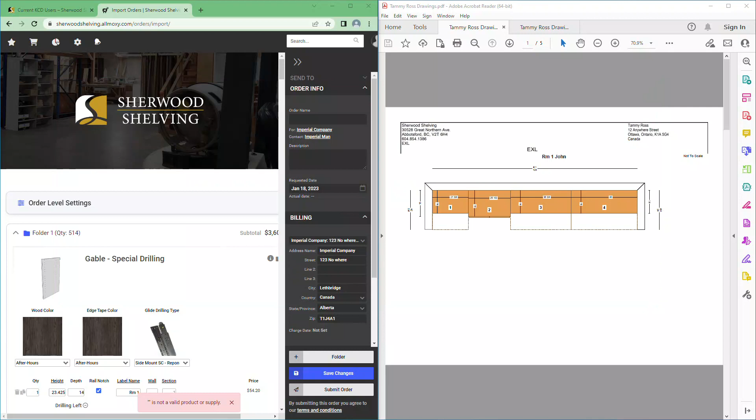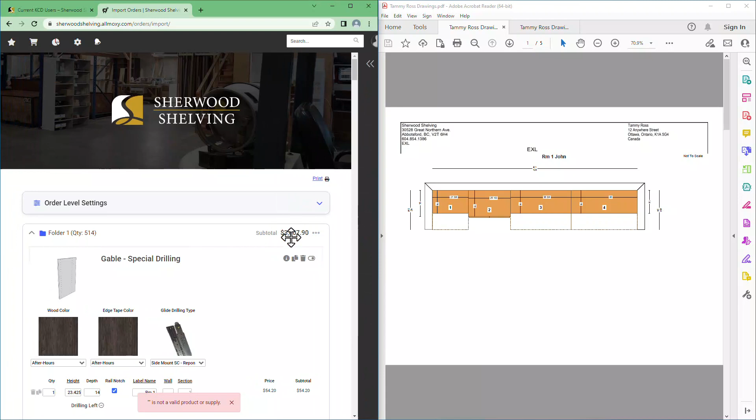So what I've done is I've split my window with my drawings on the right and the online ordering on the left. I'm just going to minimize this menu so you can see a little bit better. If we look at the drawings, you can see units 1, 2, 3, and 4 on this wall, and unit 2 is 16 inches deep.

Now, if you haven't looked at the video on how to change things to line drill in this post, I suggest you do that because that video explains things in detail. However, this will show you how to do the clean drill setting instead of a line drill.

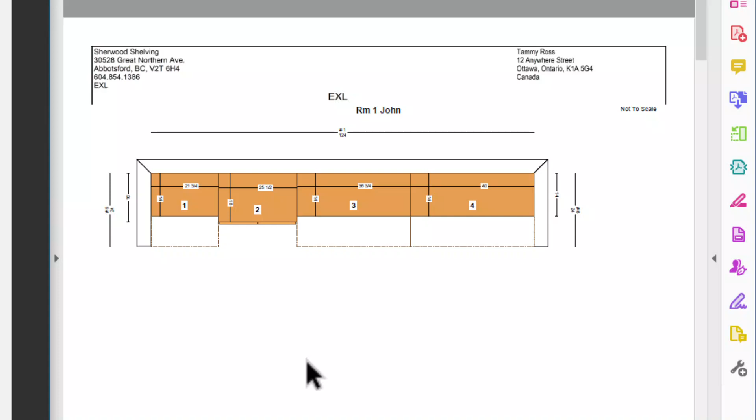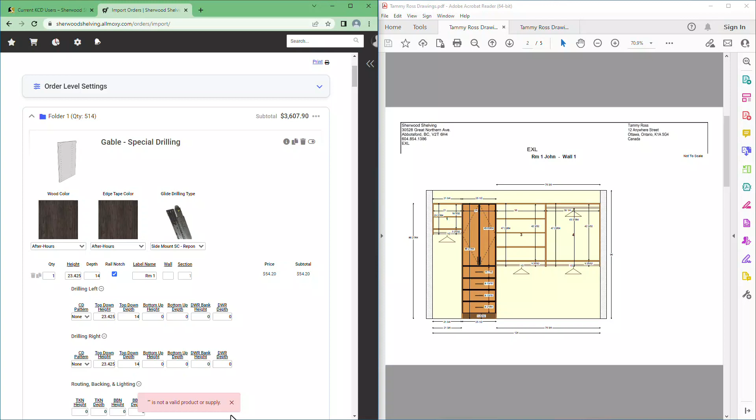Let's get started. Let's look at the elevation view, and we're going to start with unit number 1, which in the online ordering is referred to as section. Let's get rid of this validation. It has nothing in the quote, so it's not important, so we're going to close that.

As always, we're going to look very closely at section numbers. So this section number 1 refers to this unit number 1, and we're looking at the left-hand gable. It's a 2-foot gable, which we confirm here under this first line, which is quantity, height, and depth. We don't want to change any of that because that is the dimensions of the gable itself.

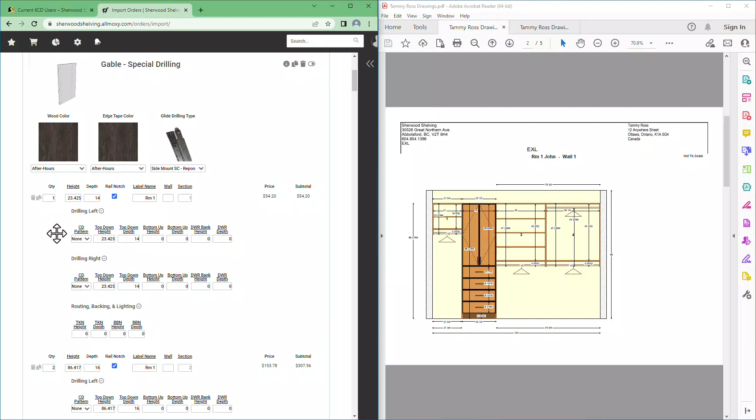Where we're going to do most of our work is down here under drilling left and drilling right. In this case, it's a long hang. So under clean drill pattern, under the drop down menu, the menu is set up so it has the regular height and the 8-foot heights. In this case, I need long hang, so I'm going to choose LH.

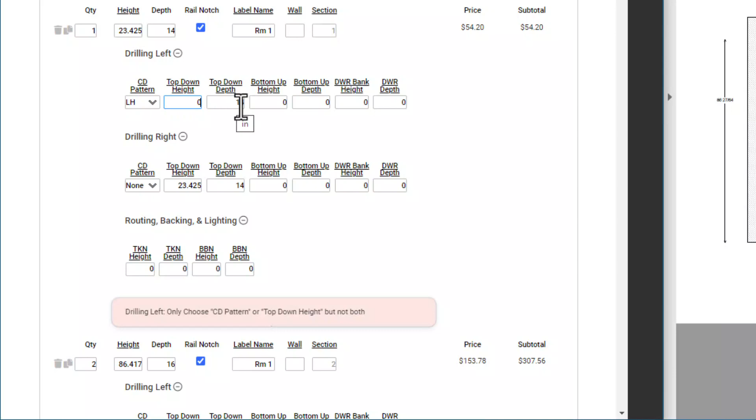And then we're going to get a message saying that you can't have clean drill pattern and a top down height at the same time. So what we need to do is get rid of this top down height, and we need a value—we can't just leave it blank, so you have to put in 0. Now we also need to keep the top down depth as 14, so don't remove that. We need that number in there.

On the right side, we're going to do the same thing: long hang, get rid of the top down height value, put 0, and it's 14. So we've now finished that off. I'm going to minimize those so we know they're finished, and then I'm going to look at unit number 2, which is section number 2 here.

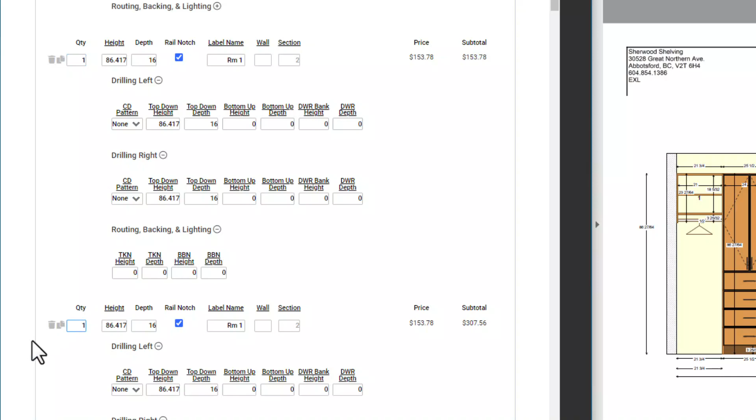Now you have 2 full-length gables associated with this unit, so I need to split those. I'm going to split that up, and now I have 2. I'm going to change that to 1, quantity 1 there, and change that quantity to 1. Now the first one is looking at the left-hand full-length gable of this tower, and it is 86.417, but I'm going to change that to long hang so that it matches the opposing gable, and change that to 1.

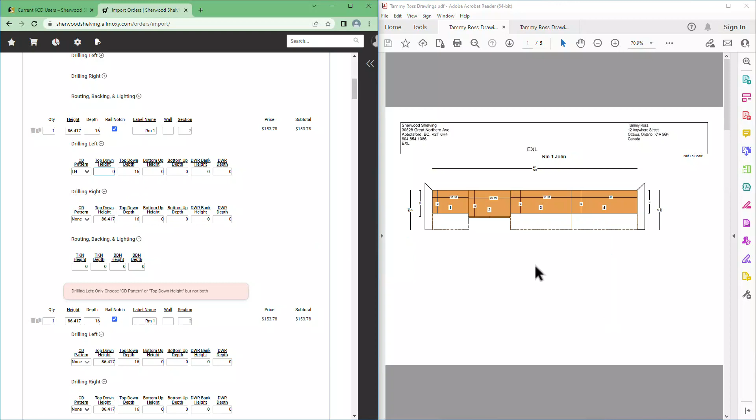Now remember in the diagram here we notice that unit number 2 is 16 inches deep. So you need to make sure you change this top down depth to 14, because that's the size of unit number 1. And if you fail to do that, it's not going to line up.

With that in mind, now let's do the right hand drilling, which is full line drill. Now in the other video I do explain about the drawer bank height and the drawer depth, but we're not going to deal with that right now. So this is actually finished. I'm going to minimize these and go on to the other gable.

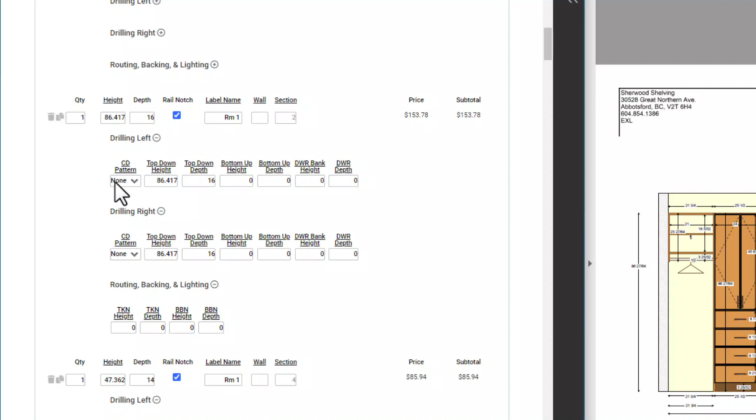So in this case, we need to keep the full line drill on the left side, and on the right side, if we look at unit number 3, it is a short hang. So I'm going to select SH for short hang and get rid of that value with a 0. And this is 16, and we're going to have to change that to 14. Hopefully you understand all that, and we're going to now minimize those because we're finished.

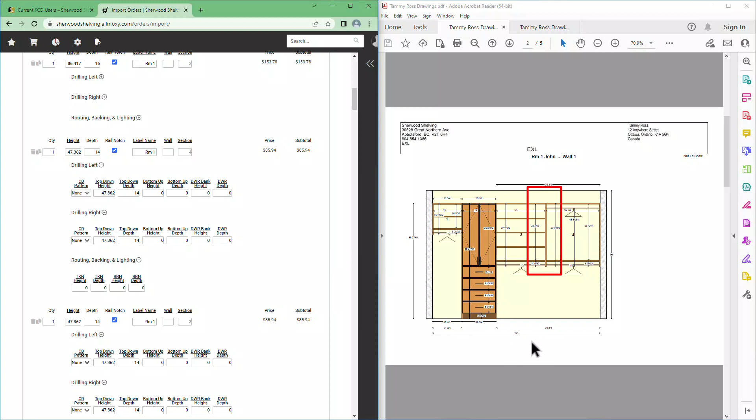And then it's out of sequence, so this is now unit number 4 or section 4, but we want to deal with this gable here, which is between unit or section 3 and 4. So I'm going to scroll down and we see section 3 now.

So on this we're going to have short hang on the left side, and we need to get rid of the top down drilling, and on the right side we're going to have double hang, and again remove the top down drilling. These are both 14 inches deep, so I've confirmed that, and let's minimize those off.

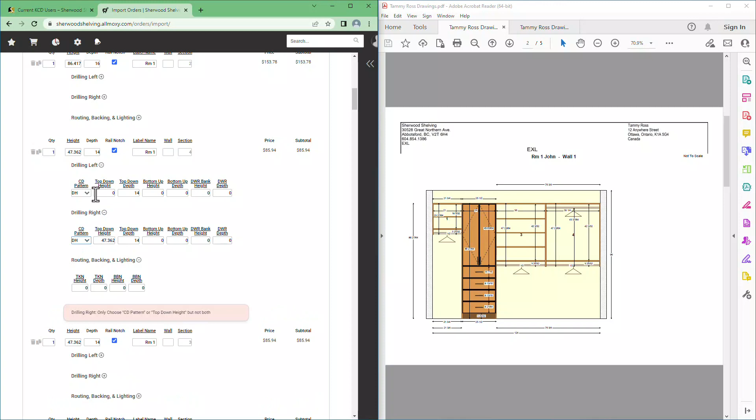Now let's go back to section 4, which is above, and on this one we only have one gable, and on this side we will choose double hang and get rid of that measurement, and it's 14 inches deep. And so if I want to change it to double hang on the right side, just so we're consistent, I'll zero that out, and that's it. So this wall is finished and everything is now clean drill.

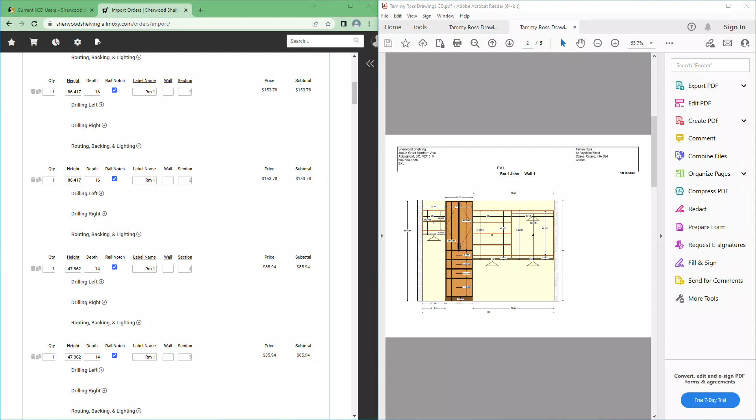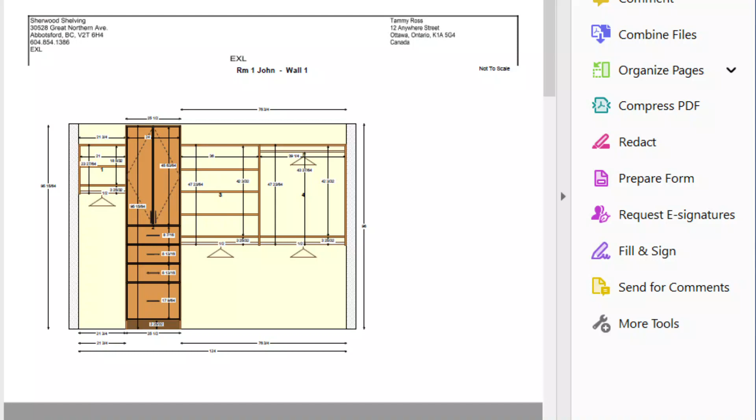I do want to mention something that is super important when dealing with clean drill, and that's when you have uneven height units. In this unit, I don't know why you would do it like this, but if you do something like this, clean drill will not work, because on unit number 2, with that being high and the gable on either the right or the left, the clean drill will start at the top of that gable, so it will not match the opposing gable. Make sure you don't use clean drill in this scenario.